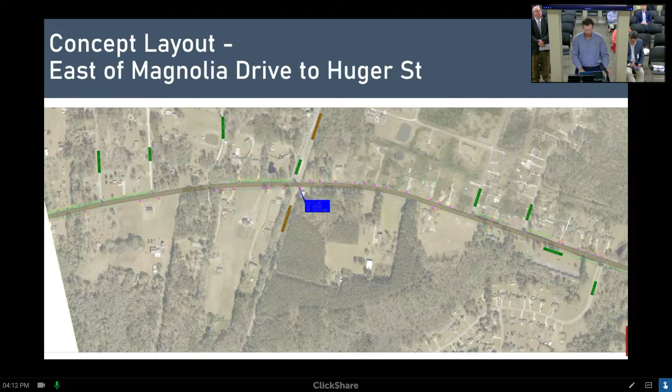This is a quick overview of the approved concept layout. You see our project limits start just after Hodgeville Road. I'd point out there are a couple roundabouts designed by others within our project limits. There was a new subdivision at the time, under construction now, if not completed. We have a couple rail crossings throughout the corridor, and the project limits end just short of State Route 21 to try to avoid any kind of GDOT coordination or involvement.

The typical section on the project has been revised slightly since our concept design. Our concept geotechnical recommendation was to provide full depth reclamation of existing pavement and then full depth widening on the widened portions. We reevaluated a little bit with our preliminary design, and the geotech provided a slightly revised recommendation of a soil cement base, one uniform base across the entire cross section. The geotech thought that'd be a much better design, providing a lot more longevity. We are going to provide an interlayer to mitigate reflective cracking that can sometimes occur with soil cement in sandy soils.

Some of the benefits of the soil cement are, like I already said, it's a very durable sub-base, and it's going to be uniform. Longevity comes to mind, as does staging - the amount of time you can get traffic back on the way is a lot quicker compared to full depth design. And then costs associated specifically with traffic control, because you don't have to maintain it nearly as long, the cost of the overall construction can be reduced.

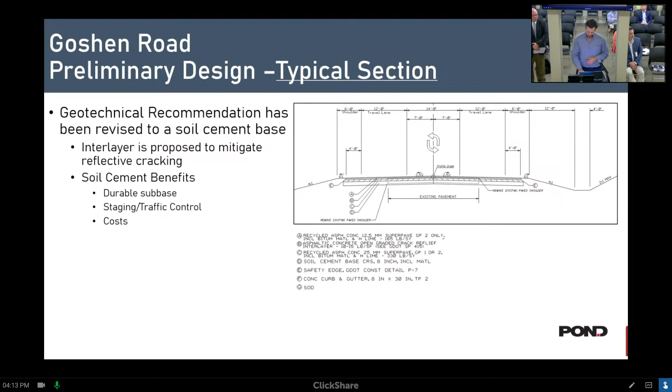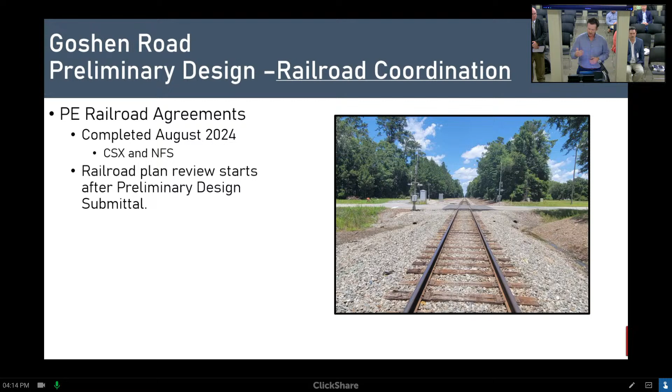As already mentioned, there are two rail crossings throughout the corridor, so one of the main tasks was to get the railroad - CSX and Norfolk Southern, two different rail companies - under agreement. The preliminary railroad agreements were completed in August of this year, and railroad plan review will start immediately after our preliminary design submittal. We want to get the design submitted to the county, make sure there's no revisions needed, give them time for comments, and then immediately turn around and provide it to the railroad for their comment review period.

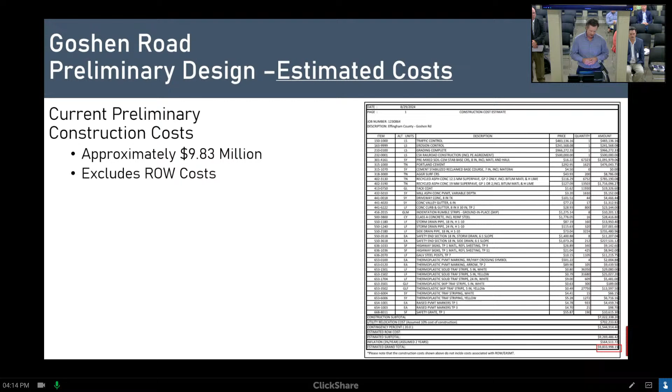So, updated cost estimates: our current preliminary cost estimate is approximately $9.83 million. This does exclude right-of-way costs. We plan to, once we get a little further in right-of-way design, really lock down right-of-way costs and provide an updated cost estimate for right-of-way.

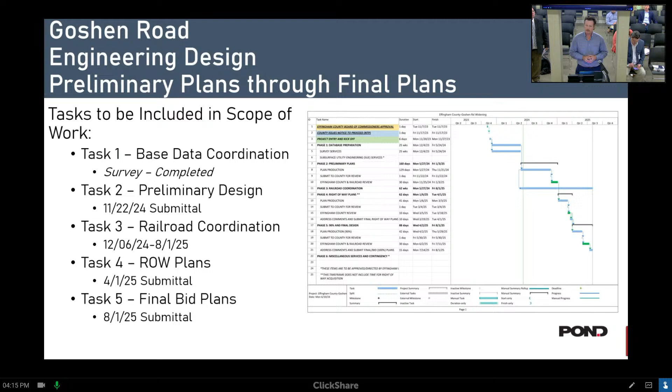Just looking at what's included in the scope of work and the timeline associated with them. As already stated, our base data coordination survey was completed this year, and then we immediately kicked off preliminary design. That is currently where we're at. We plan to have a preliminary design submitted to the county November 22nd of this year, and then we'll immediately move into railroad coordination, and that'll go to the remainder of the project. Right-of-way plans, April 1st, 2025, and then final bid plans ready for advertisement August 1st of 2025. So just a quick rundown of where we're at on Goshen Road.

Any questions, comments? I wasn't aware of the FDR. Is that after you reevaluate, it still needs FDR? So the full depth reclamation - the geotechnical sub did not like how it went with a uniform cross-section.

So we're going to a soil cement. It's a very similar process. We're just able to have one uniform cross-section of that soil cement base instead of full depth reclamation with the wide portion. So you don't have to do FDR with the soil? No, cement. Okay, good. It's a similar process, but it's not considered FDR. It's a soil cement base.

Will it still be grinding everything up, or will you be able to use any of the existing? It would still have to pulverize the pavement, and then the new widened portions, they just add cement to it. Is the existing pavement just too far gone to do anything? I believe so. I believe it's just 2 to 3. The amount of truck traffic is - there's a very high truck percentage on the corridor, so I think that's part of the concern too.

So what is the rideability going to be? I've heard engineers say this, because I got burned pretty bad on Grayson Road over in Guyton, where our specs, I don't think, had the right rideability, is the term I was told. So this will be a smooth layer on top, correct? Correct. It'll have your normal asphalt layer, about 1.5 inches.

Because I thought I got burned on Grayson Road, but here with the amount of traffic, I mean, we'll get eaten alive if it doesn't turn out right.

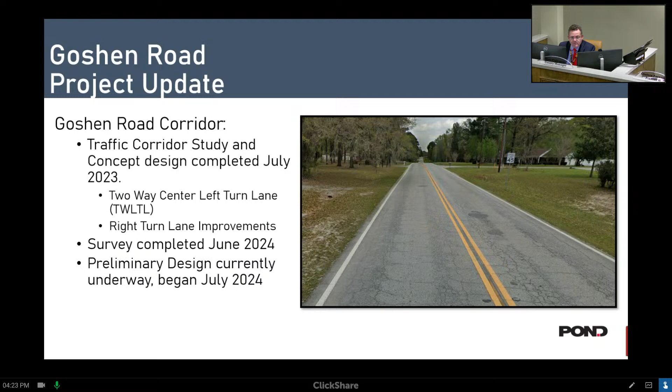I just know 4 years ago when we started talking about this Goshen Road, and here we are, don't even have the design. But how about where it ties into the parkway? Do you have that design from DOT? Yes, I believe that is shown right here on the right side of the page, that roundabout.

We do have that. Okay, y'all got that, so you can design to make sure we match everything up. Correct, we'll tie into their project. Okay.

Any other questions regarding Goshen Road?

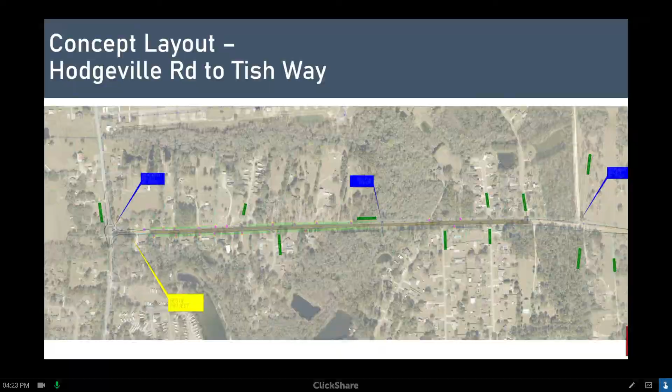Richard, do you want to jump in there for further discussion? Yeah, why don't you jump in, that's our third item. This one should be fairly quick, just start off.

Another project currently under concept design is SR 30 Midland Road Roundabout. Current conditions: it is an existing minor road only stop control T-intersection, meaning SR 30 is the main movement and Midland Road has stop control. SR 30 is a 2-lane road with 12-foot lanes, rural shoulders, and a 45-mile-an-hour posted speed design.

It's an oversized truck corridor, so we have to take that into account with our concept layout to make sure oversized trucks can make the proper movements. Midland Road is a 2-lane road with 11-foot lanes, rural shoulders, and a 55-mile-an-hour posted speed design. The project goals are primarily to reduce congestion along Midland Road and improve overall safety at the intersection.

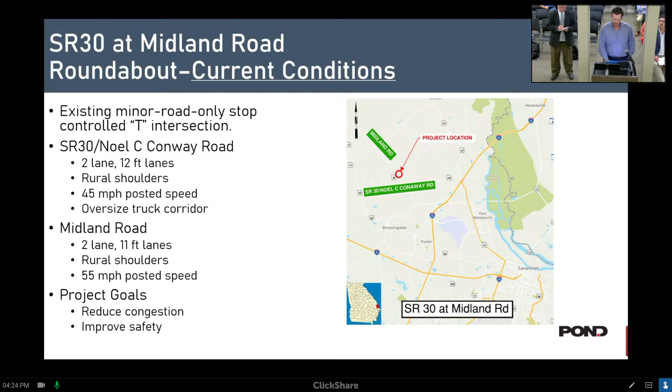I'm pretty sure that's 55 along SR 30 versus 45. Okay, we can verify that. Yeah, we'll look into that.

Where we're at in the project: the traffic study is underway, which began in September. Our early analysis shows a single-lane roundabout as the preferred alternative in our ICE evaluation, and that's what this layout is showing. It's very rough, some of our preliminary concept efforts. There will be iterations and tweaking, but we want to give you an idea of where we're at.

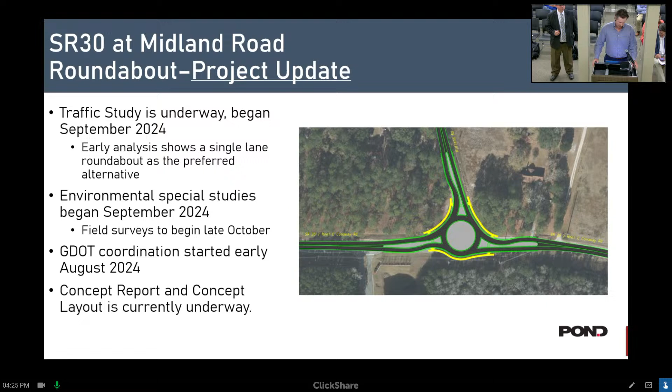Environmental special studies also began in September. Field surveys are set to begin in late October. GDOT coordination started in early August, and we're currently putting together the concept report and concept layout for submittal to GDOT.

GDOT coordination is required for this project since SR 30 is a state route. We're required to get a GDOT encroachment permit, and because it's considered a large on-system project, it has to go through a new encroachment process pushed out by GDOT. That process is outlined in Chapter 11 of the Driveway Encroachment Manual.

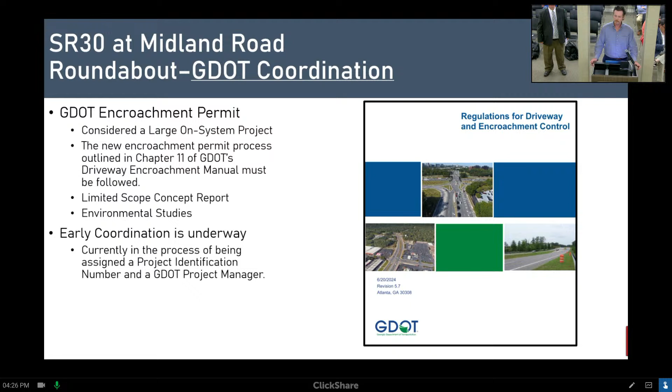The main points are that you have to have a limited scope concept report now with GDOT oversight, and some environmental studies are necessary that usually aren't included on local-let projects. That early coordination is underway. We're in the process of getting a PI number and GDOT project manager - since we put these slides together, that's been obtained. We now have a project identification number and a meeting set up tomorrow with the GDOT PM to discuss the project further.

This task included the scope of work and associated dates. GDOT coordination is going to be a major item for this project to get an approved GDOT encroachment permit. Our concept development is underway, with the draft concept report submittal scheduled for November 1st to the GDOT project manager. Preliminary design is scheduled for end of March 2025, and we hope to have final bid plans by mid-June 2025.

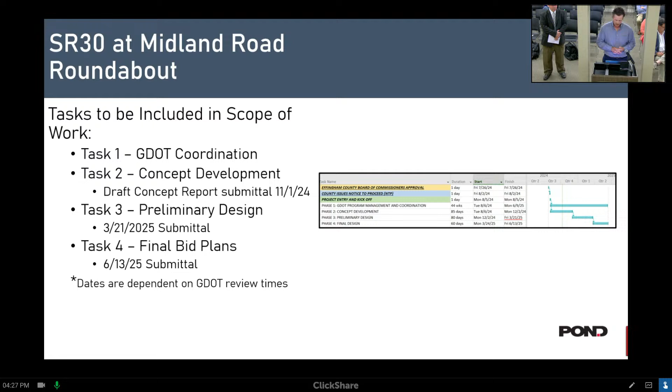These dates are dependent on GDOT review time - we're trying to expedite everything we can by starting with early coordination, but unfortunately we don't control GDOT's review times. That's just a quick update on where we're at on the project. Any questions, comments, or discussion?

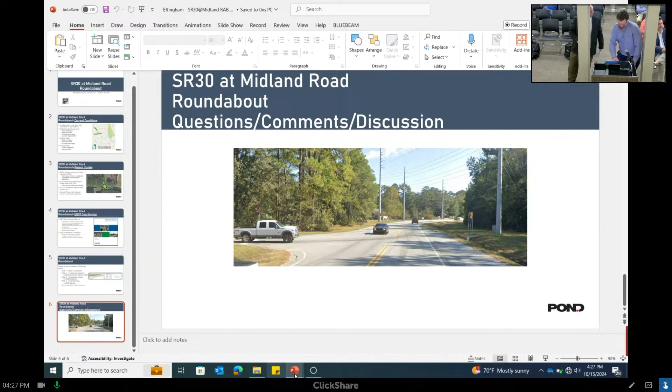All right, I'll pass it on to Richard. Okay. All right, great, thank you, Caleb.

Thank you all. We'll talk about the Blue Jay Road corridor study and concept design. We've been looking at existing conditions, done a traffic study overview and improvement recommendations, and we'll talk about the schedule and next steps. We're at the stage where we've done the analysis and will be moving into more design concept work, so you'll see more pretty pictures like Taylor had. We'll start with a few that show the corridor and talk through the traffic results.

The limits of the corridor are from Sand Hill Road to State Route 21, approximately 11 miles. The speed limit varies quite a bit, changing about 6 times along the corridor from 35 to 55 miles an hour - that's one thing we're looking at, how to make that more uniform with the design. It's classified by GDOT as a major collector road, typically a 2-lane undivided section, with a mix of rural and more suburban character of development occurring.

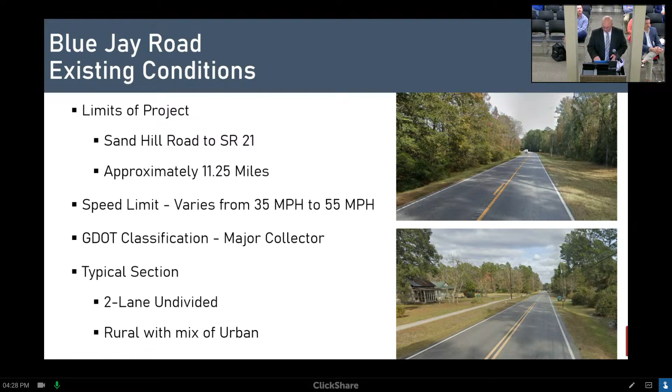So we looked at, through this process, about 21 intersections along the corridor that were streets or major driveways to be examined in this process.

So look at that along the future Effingham corridor. You can see this graphic, and you'll see a few graphics that look like this. Before you move forward, I wonder if it'd be worth pursuing changing that from a major collector to seeking it be an arterial road, since it goes from 21 to 17, connecting two state highways. That has implications for things like service delivery if it was an arterial road. I don't remember the exact qualification definitions, but that's a good point, and I think this one, along with some others, is being looked at within the transportation plan.

I wish we could address that while we're doing this and get the state to reclassify that. It could have some real major implications with service delivery. Okay, all right.

This also shows where Effingham Parkway comes in next to Hodgeville Road, which will ultimately connect. Again, these graphics are sort of high-level planning traffic graphics at this stage.

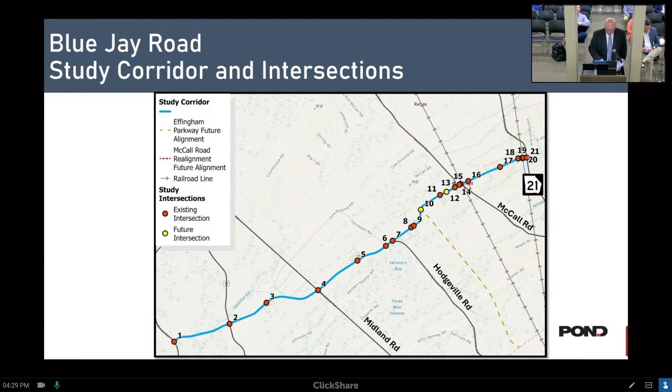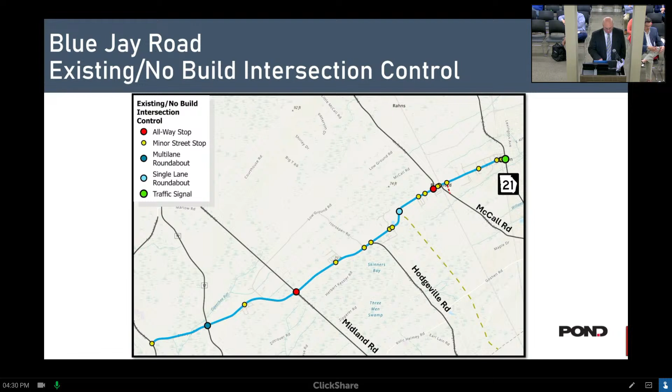Speaking of alignments on the road, specifically for the Durkins family that lives at the corner of 9th Street and McCall - I know they possibly may be affected. Have we gotten far enough down the line where we're actually looking at specific parcels yet, or are we still getting that information together? I think that's on the next project, the Southeast Road Network, but yeah, I agree.

But that's not on this one - no, it'll be on the next presentation right after this. Okay, I noticed that, we'll talk about that on the next one. Okay, that's one of my questions. But they're related, since they're in the same area.

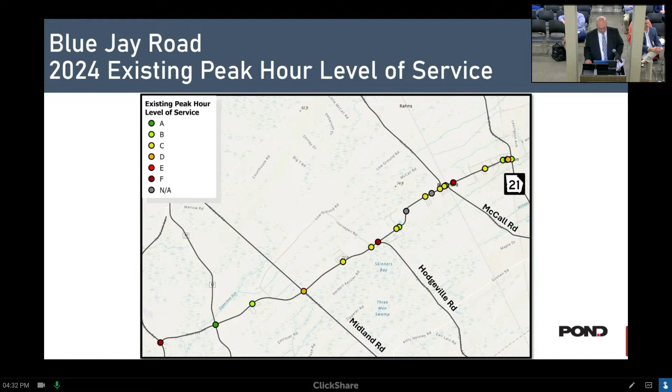One of those intersections on there will be going away, right? Not Bunyan - the Herbert Kessler Road, which is the one where we had that portion we abandoned, or are going to abandon. Can't remember the name of the road. I know which one you're talking about - I don't have the map pulled up, but there's a portion showing an intersection that will not be an intersection anymore. I think I might have referenced that to you. That and Otis Seconder are both disappearing. Then that's it - also, we'll talk a little more about the realignment, as Herbert Kessler and Otis Seconder will both be disappearing.

So we have some existing level of service.

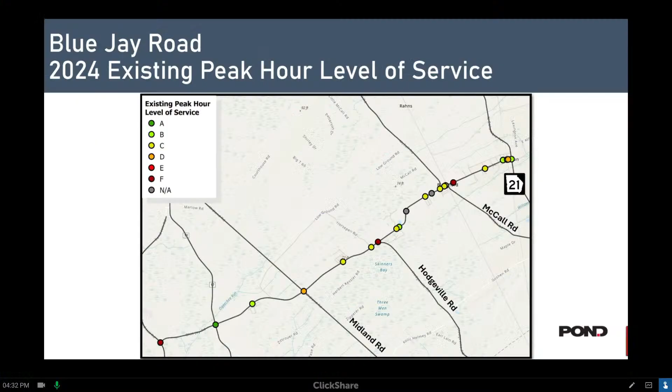We also looked at crashes along the corridor to see where they're occurring the most. This is a heat map showing the concentration of crashes.

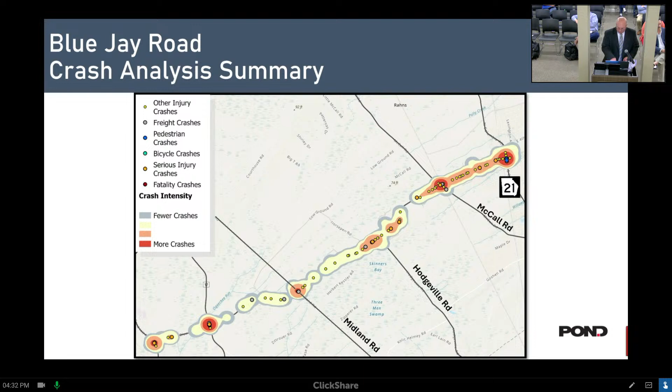Obviously we expect to see a lot near 21 just because of the volume of traffic, but you're also seeing a lot of crashes at McCall near the railroad, that intersection, considering the volume there. The 17 intersection, which is being addressed a little bit with a roundabout as well. But a little bit of what you'd expect for the rest of the corridor, some crashes here and there, but a little more than you'd expect for the volume of traffic.

A lot of those crashes on McCall might have been before we had the three-way stop resolved, when we first built that. There was almost an accident every day before we got that figured out, how to keep that from happening. We had quite a few fatalities in the past, but I don't see a lot of fatalities now.

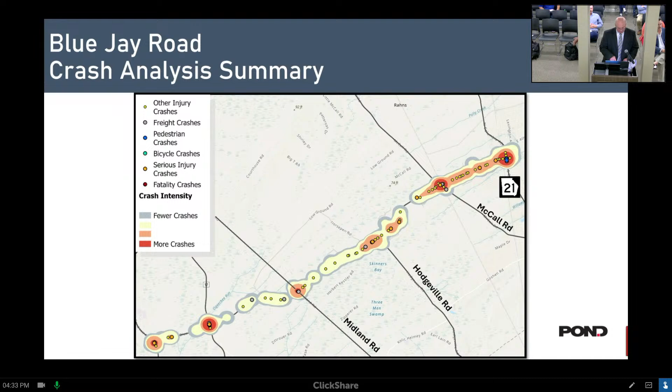Let me go to the next page. This next page shows that, because that may not have been captured in the last few years of data here. This was from years back.

What this is showing is that we've got a lot of rear-end collisions and also non-collision-with-motor-vehicle crashes. A lot of those are run-off-the-road crashes, because you don't have a safe, forgiving roadside in some cases along here. It could be just a little run off the road, but it's something that has to be a reported accident. You've also got some angle crashes occurring, and without turn lanes those angle crashes become more prevalent along the corridor. So these are signs of stress on this corridor as a two-lane in its existing format, things you'd expect from this type of corridor as it gets into capacity.

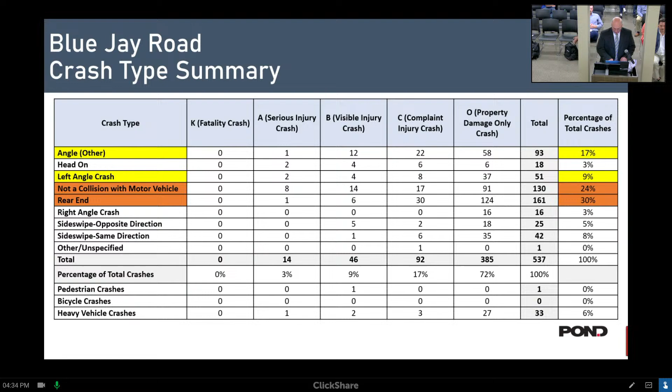So we also looked at traffic volume forecasting along the corridor. We did a couple of things: we applied a background growth rate of about 1% a year through 2049. On top of that, we added known developments occurring here in the near future. The background growth rate is a combination of the overall background GDOT count station growth rate in the area and what's looked at long-term for travel demand in the corridor, to get an idea of how much growth we could expect year over year into the future. But then we also put in these specific developments, because there's a slightly higher growth rate occurring right now.

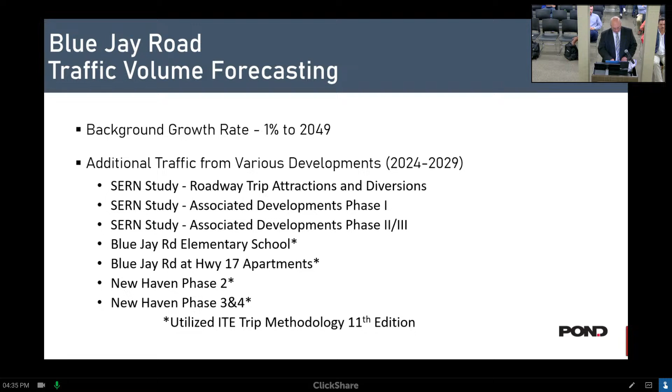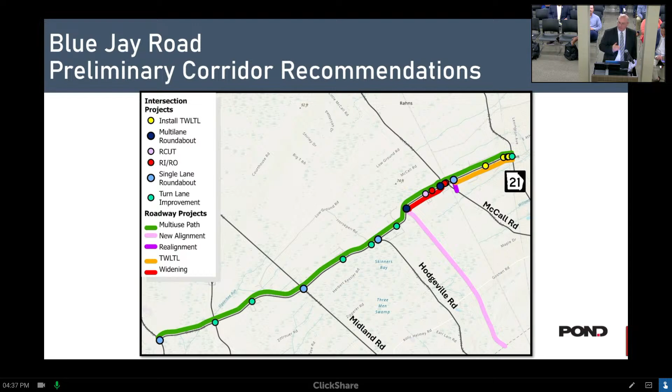We did analysis of all the intersections to look at. We can see where the blues are locations of either multi-lane or single-lane roundabout recommendations through there. We also have a couple recommended for some right-in, right-out, or R-cut, which is basically where we're left-in but not left-out to the building there.

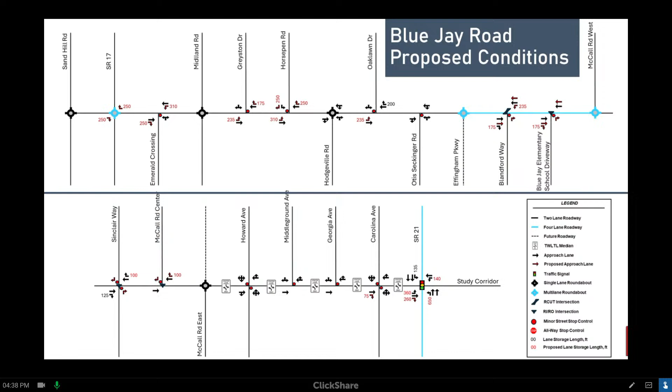Another thing you haven't seen yet, but it'll be in the next stage - we'll be looking at some pedestrian crossings. There may be a need for pedestrian crossings near that school that we could work out because of the neighborhoods within walking distance to the north or northwest.

So that's kind of a general layout of the alignment, again needing that multi-lane section through there and through that part of McCall. Shown here is our traffic analysis version of the lengths of turn lanes that are needed. Some just need the minimum amount, either 175 or 235, but others need more, so we had to analyze to make sure we got the turn lane appropriate for the level of traffic anticipated. We'll carry that more into the design process.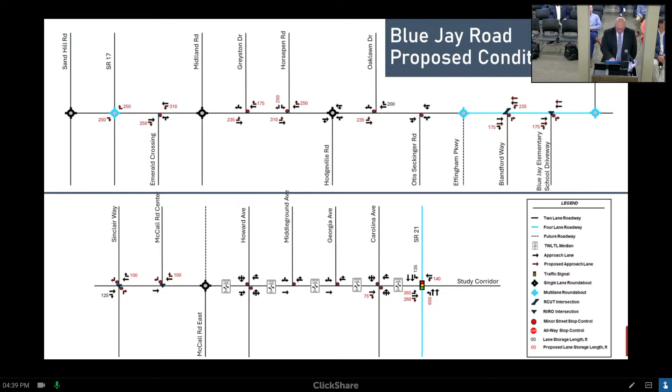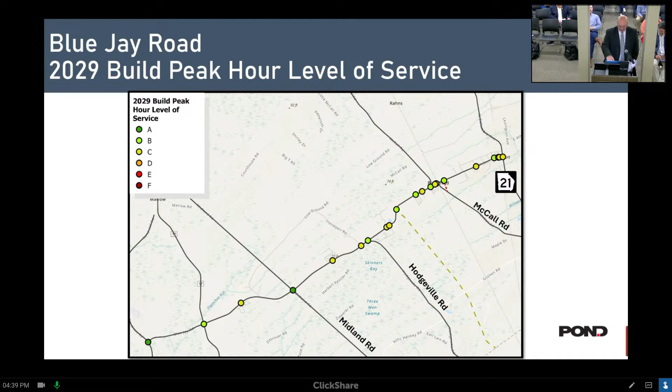So with that in place, your future level of service for 2029 - you can see that's giving us pretty much level of service C or better on all those intersections. And even in 2049, a couple will go to level of service D, but that's considered acceptable in an urban area. We have one unsignalized intersection that will have a level of service E - that's generally acceptable if someone's pulling in from a side street and has to wait a little longer. Overall, we think that's a pretty good level of service to have and expect for this roadway system in future conditions.

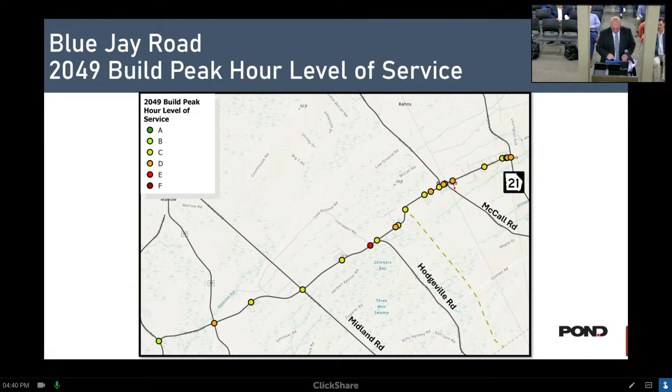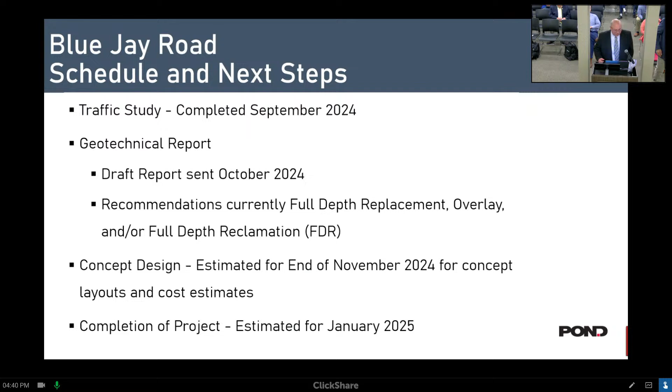Okay Steve, can you check his mic? I just got a text that nobody can hear the speaker. Did you tap it? Yeah, it was off. Oh, okay. Gotta do the whole thing again? We'll go back to the beginning. Thank you sir, we can if you're not, but we also have this electronically too.

So the schedule and next steps - the traffic study is scheduled to be completed here, it's completed here in September, so we're getting that wrapped up and getting final comments on that. The draft report for the geotechnical will be sent out by the end of October. What we're finding right now is they're recommending full depth and a variety of different improvements on different sections of the road. We'll have to get that report to understand which ones make the most sense where. They do think some full depth replacement could work probably on some of those existing 2-lane sections of road.

So what determines that? Is that your boring samples that help you decide the application to do that, or?

It's looking at the soil samples and the volume of traffic anticipated on the various sections. And sometimes for consistency, if you're widening the road, you want to have a consistent section from the new part to the existing part in many cases.

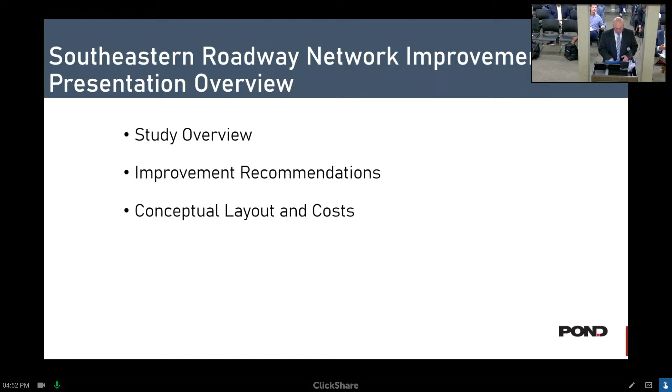So this is the Southeast Effingham Road Network improvements. This is looking at network improvements in the area just north of the Blue Jay corridor, but also how we connect over from McCall Road to 21 in conjunction with some developments occurring in the county and the city of Rincon. We'll do a quick study overview, improvement recommendations, and then talk about some of the conceptual layouts and costs that were developed in this.

So some of the goals of this study were working with Rincon and the Georgia International Rail Park developer to provide a connection between 21 and McCall Road. Why are we working with a specific developer on this? Well, part of it is because it's going to go through the property of that developer, and they're willing to work with the county to make sure that connection is made.

So another goal is to provide a railroad grade separation, so there's another way to get across that railroad without having to be caught by it, and realigning McCall Road away from the railroad and improving related intersections.

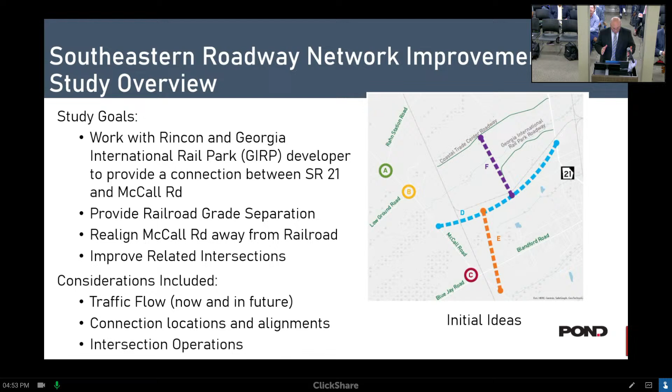Looking at traffic flow now in the future, connection locations and alignments, and intersection operations. So we looked at the traffic flow and what was generated by these new developments, traffic flowing through there.

These were the recommendations that came out of the study: development of this east-west road, labeled New East-West Road. We wanted to grade separate from the railroad tracks and bring that in, crossing kind of across from the Effingham Power driveway. That gives some flexibility in the future if you ever wanted to do some other connection or connect up a different way.

That was actually very tight as to where that bridge could go. You can see it's not at 90 degrees from the railroad tracks, it's slightly skewed. We did that because we need enough room to come back down before reaching McCall Road, so we have to have enough rise to get up over the railroad track and then come back down. Just above where it says proposed bridge, that gray area is the rail layout, the rail yard they want for this industrial park. We're trying to avoid that rail yard and still come back down in a way that we can bridge over the railroad track.

So that's the east-west road. It would have a connection up to GIRP Road and to the new development to the north as well. We also looked at improvements to Blue Jay, including widening McCall Road from there up to the new east-west road, and then in the future a widening from McCall Road further up to Rahn Station Road.

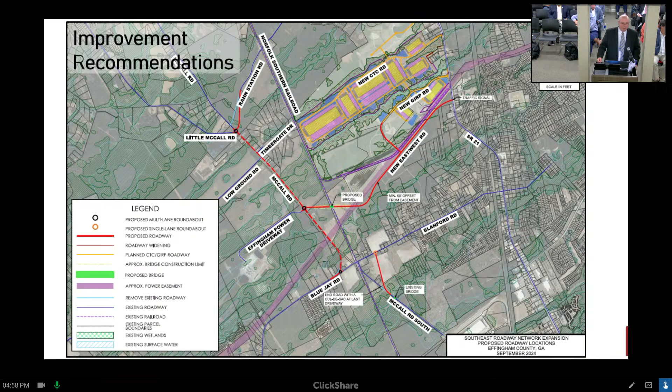So when are we going to decide the specific location of these roads? I don't know if we're going to have time to get into it in this presentation, but there was a recommendation of the phases for this. And when we eliminated that connection from Blandford to the east-west corridor, we really made that section, that little connector road from McCall to Blandford, moved to the last phase.

It's in your 3 phases, and it's in phase 3. The reason we did that is we wanted to see, once the east-west corridor gets opened, what sort of effect it would have on that intersection of McCall and Blandford as it is right now. If it continues to get worse, then it could be a case that we see the need to actually pursue the realignment.

But the one thing this allows us to do, and Effingham Parkway allows us to do, is basically remove all truck traffic from east of the McCall Blue Jay intersection. So anything from where we have a roundabout at the three-way stop, to Rincon, and McCall all the way to Blue Jay Elementary - there would be no need for trucks to be on that, so we would make that a non-truck route. They'd have no basis to go on it, whereas now it's the quickest route to a truck route.

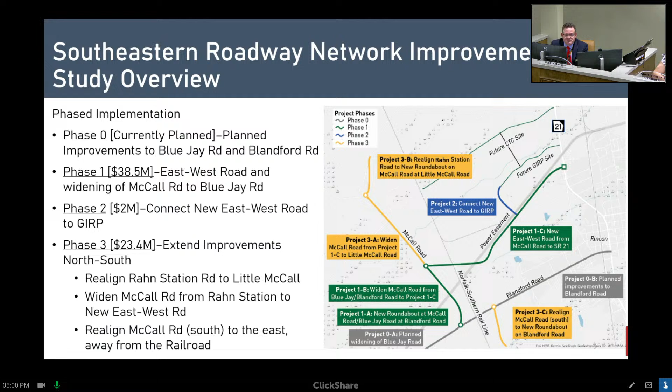Well, the reason I drill down on that is I'm committed to communication. Once it was time to bring them into the process, they would be aware, and we would have communication. And so I wanted to bring this up to you, and I had mentioned that to Mr. Durkin as well, because this is different from what was originally in the newspaper and the news and so on.

There are some huge sections of this project which are no longer deemed viable and were removed, that would have affected his property. So I think this does change things a little bit, and we can reach out to him on this. I'd almost suggest that be removed and not even be a phase 3, and I'll tell you why - because we've got a long ways to go to get this other part, then we've got to see what the traffic patterns are.

You're really talking 7, 8 years out now that we'll know. Right. So why create heartache until we get within 2 or 3 years and say, you know what, this didn't really relieve it, we need that. Because I'm with you - I can see the gateway, people coming Goshen other ways than this road up to that crazy stop sign. Trucks not going north - they're going to want to go to Gateway, to the Parkway. Fastest, like you said, that's the fastest way.

It's just gonna be a challenge for the school buses, but it always has been. It's still a safety issue. We don't know what's going to happen with the school going in there, but they've always dealt with it. Traffic will never be an ideal situation, but there's still a safety issue there. It's hard to make that left, and it's dangerous, and it's probably why you saw a lot of crash data there earlier.